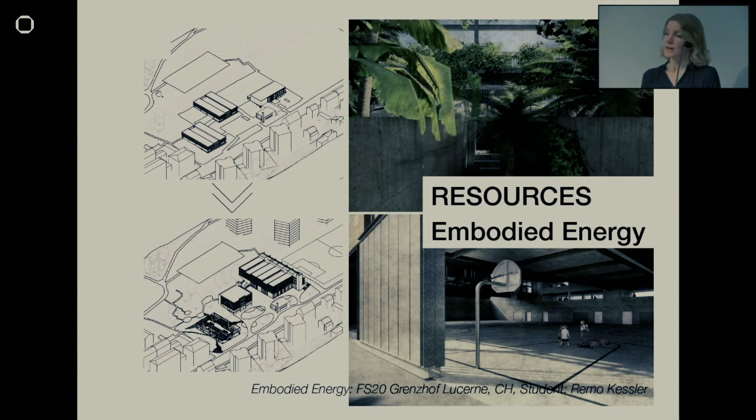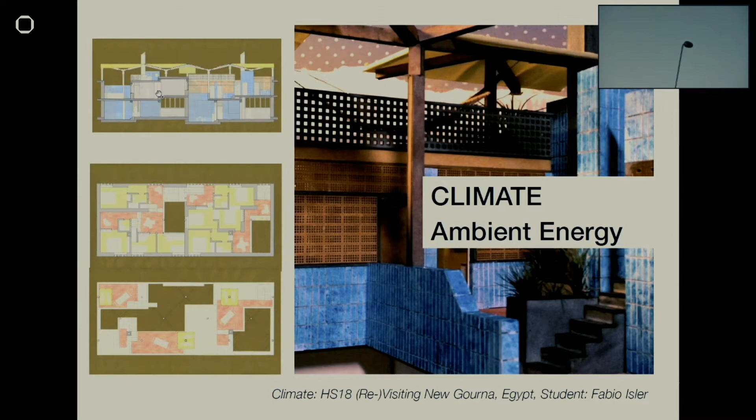Our building stock, our existing building stock, and what we can do with our new buildings. I was asked to tell you about what I do in my daily job and how we are preparing our buildings to be climate neutral and how we make them future-proof.

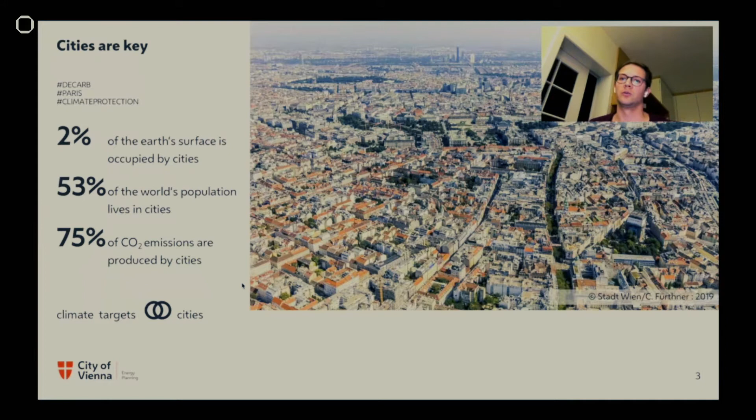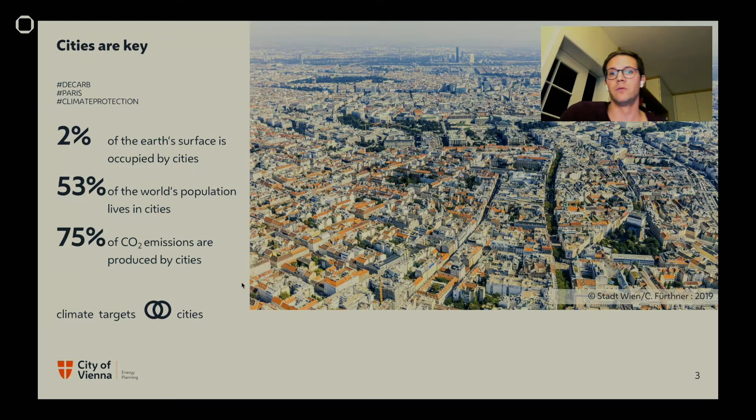Cities, of course, are very important to tackle climate change. They just cover about 2% of our Earth's surface area, but in the meantime, more than 50% of the world's population is living in those cities. And the cities produce more than 75% of our CO2 emissions currently, so that's quite a lot. That means if we want to fulfill our climate goals, we have to start with our cities if we want to have some chance. Therefore, we have to use the renewable resources which are inside our cities.

Basically, the resources are those four which you can see here: deep geothermal energy, which will be integrated in our district heating network; shallow geothermal energy, which can be used for heating and cooling individual buildings; and waste energy, on the lower right side of the picture. It is important to use the energy which would otherwise go back to the environment and heat up our cities during summer even more, and instead use this energy for other use cases.

And of course, solar energy is the fourth renewable energy source in our cities, and we have to implement it in a very creative way so that we not only produce energy on an area, but also make a green roof out of it, make a livable space out of it, so we can use our limited free areas in the city very smartly.

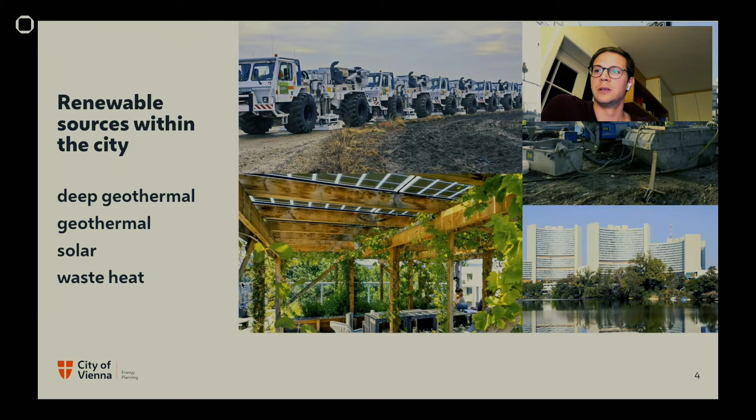In Vienna, we have climate protection areas. Sorry, this graph is in German, but I think you can imagine what it means. In those areas, you can only use renewable energy sources or district heating for heating and warm water for your building - you are not allowed to use fossil energy for those purposes. So they are completely fossil free, those areas. Currently we have 4 districts, but in the next 2 years the complete city will be covered with those areas.

They are just important for our new buildings. In the future, of course, we also have to think about how we can integrate the existing buildings into those climate protection areas. But that has to be done in the following years, I guess.

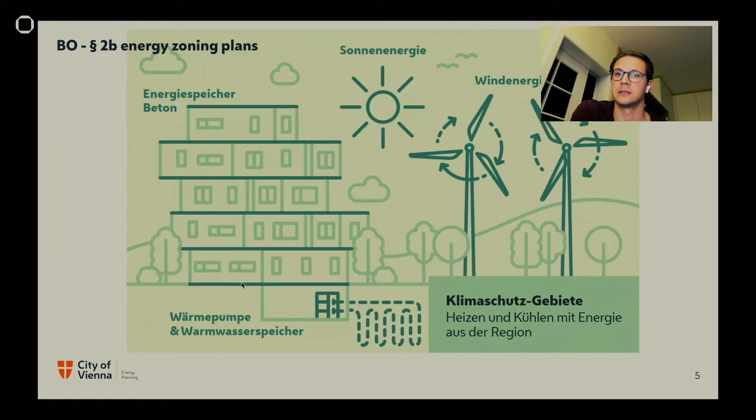Therefore, the building stock will be very important because most of our cities are already built, and therefore we have to find solutions for how we can decarbonize our existing buildings. In Vienna, we have more than 400,000 apartments with gas heating, with gas boilers. We will connect a lot of them to the district heating network. A lot of them will use heat pumps, and a small amount of those buildings will use...

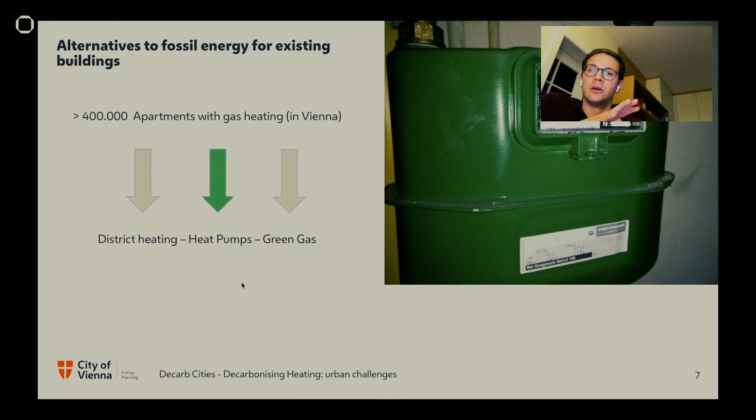...green gas, but green gas, of course, will be used more efficiently in other areas, like energy producing plants, power plants, maybe for industry, and buildings are not the first priority for using green gas.

Because cities are so limited, we have to work together with our regions. We have to import green electricity and green gas in the future because the city's area is just too small to produce enough energy right inside our cities. Currently, we are importing fossil fuels from all over the world, so that has to change.

One showcase project from Vienna is MGG22. It's an apartment building where the energy comes from the soil. It uses geothermal energy, and it also uses wind energy for powering the heat pumps. The windmills, of course, are not located in Vienna - they're on the outskirts of Vienna or in Lower Austria.

And if the windmills produce too much energy so that the market price would be negative, the heat pumps run and produce warm water and room heat. So we are storing our heat, our renewable energy, in the building's concrete. Concrete is a very effective battery system, you could say, for storing renewable energy.

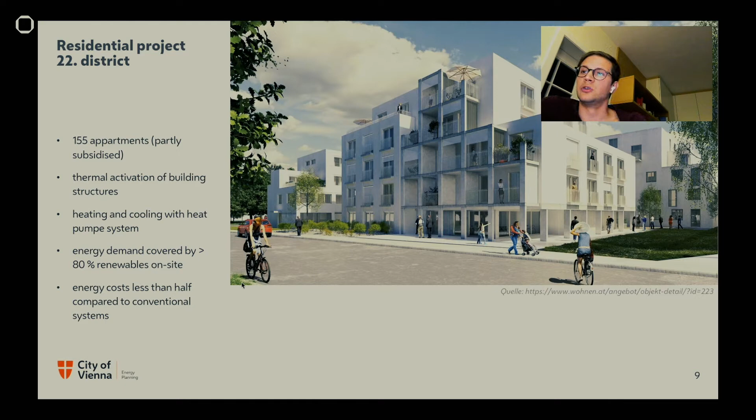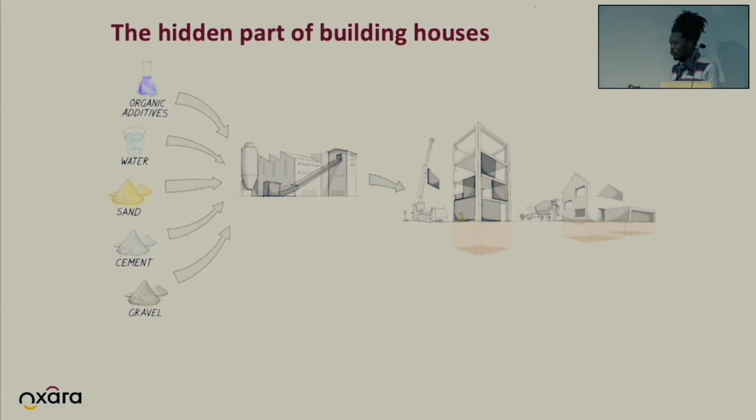We all know that we need gravel, sand, cement, and water to produce the concrete that will be delivered on the construction site. What we often forget is that during this process, there are millions of tons of excavation material that is landfilled.

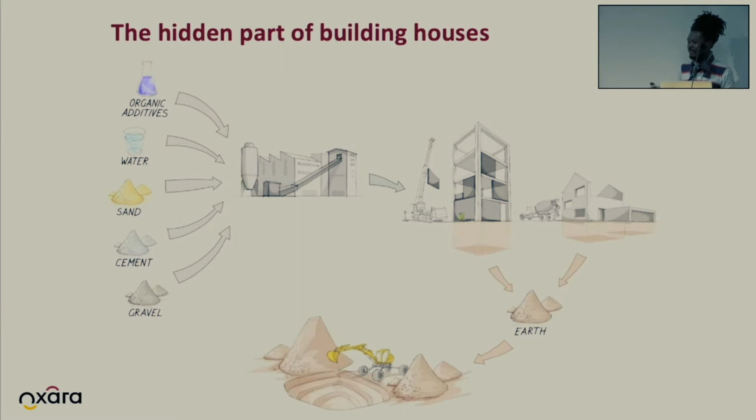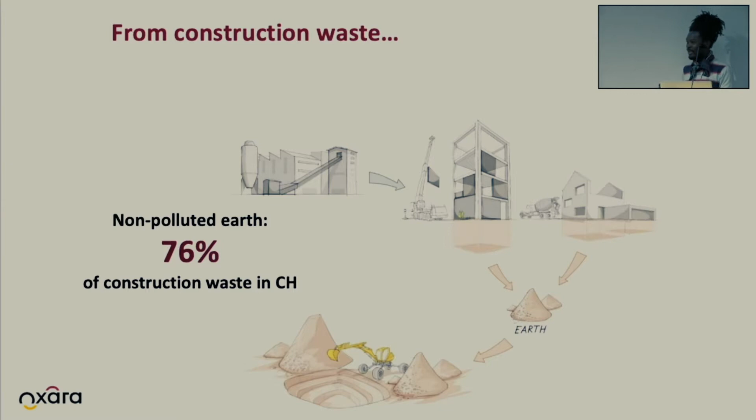Non-used resources that are locally available. In Switzerland, this represents around 76% of construction waste—almost 35 million tons of excavation material landfilled each year. Worldwide, we are talking about more than 1 billion tons of excavation material.

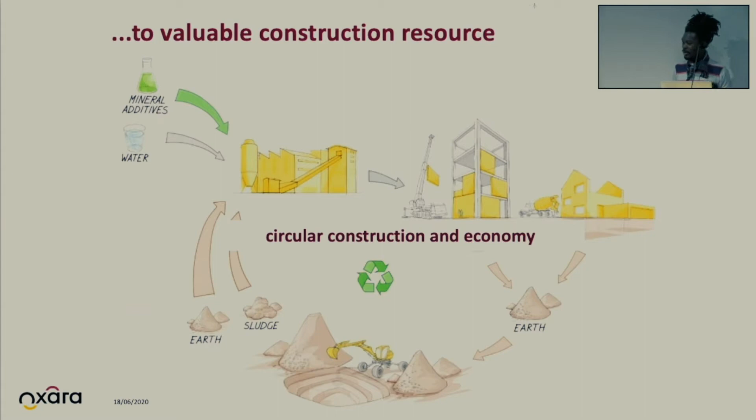So what are we trying to do with Oxara? Turn this construction waste into valuable construction resources to promote circular economy in the construction industry. How does it work? Here I have a small video that shows our process.

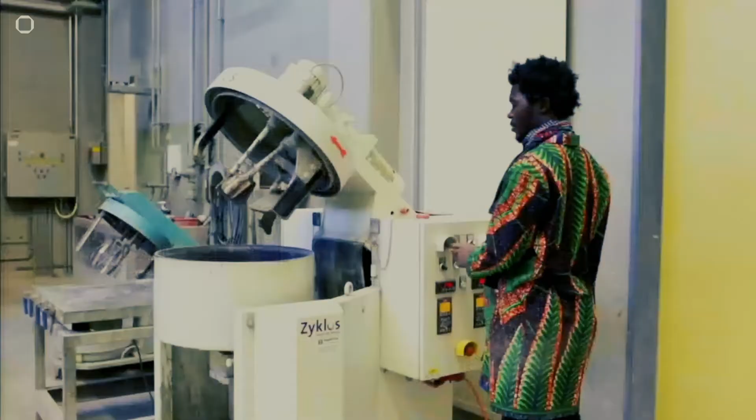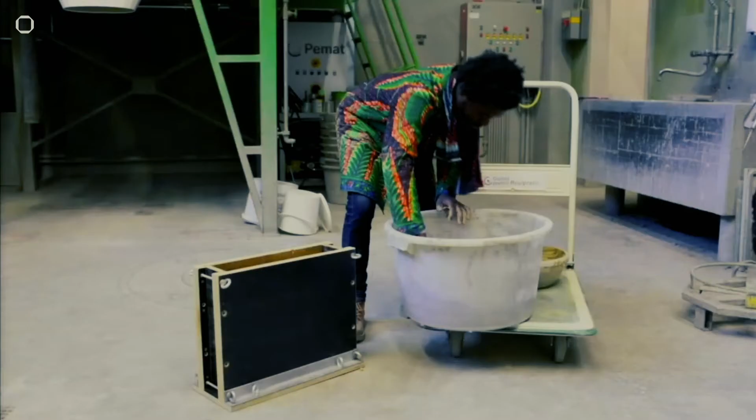Basically, we take the waste, we add water, and we add our technical solution, which is our mineral additive. We mix everything in a normal concrete mixer for the material to homogenize, and then by hand or similar construction processes, you can have a fluid mix, vibrate it, put it in a formwork, and after 2-3 days, or 1 day depending on the volume of the wall, demold it.

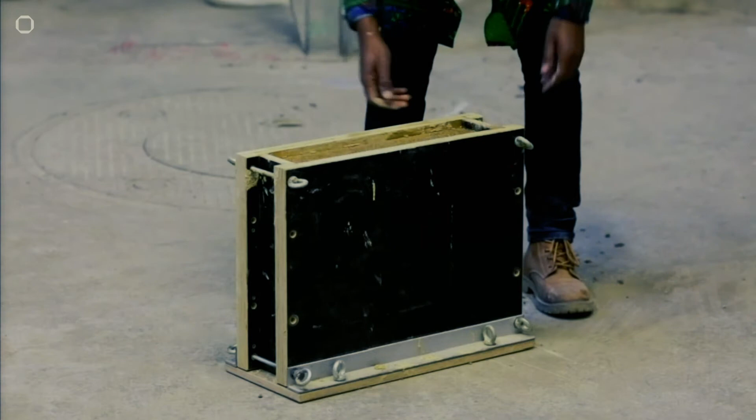Therefore, you have a material which has self-supporting load capacity you can use for non-structural applications and for low-rise buildings, 2-3 story houses, for instance.

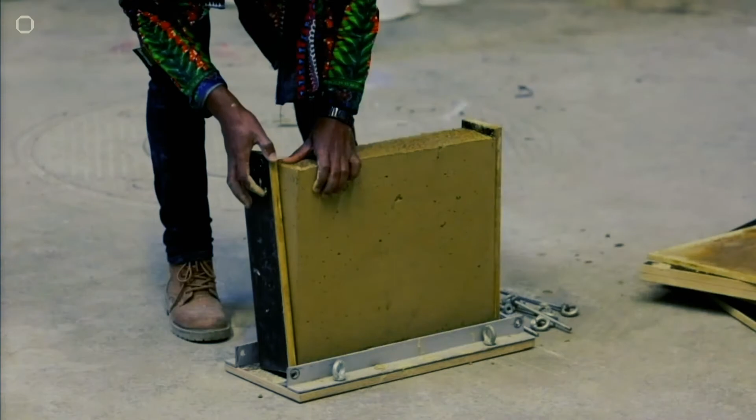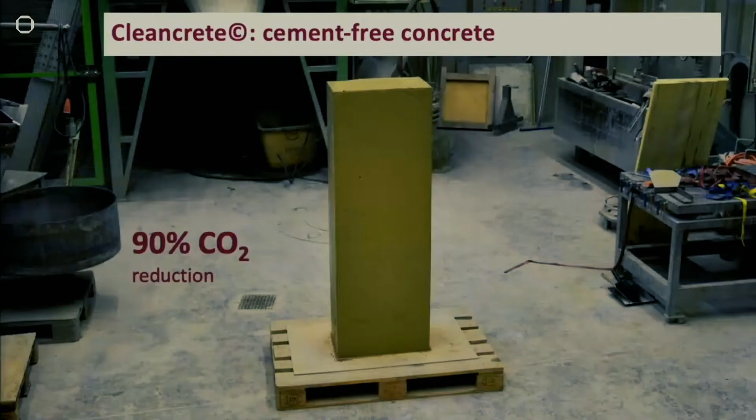So this was the outcome of my PhD, basically. And since then, what happened is that we tried to produce at a bigger scale. Doing also the life cycle assessment, we realized that we can reduce up to 90% CO2 compared to normal concrete.

So here we have a first cement-free concrete technology. We have also done other different tests—how can we use the material for floor application, for instance?

Here we worked in collaboration with In Situ Baubureau Architecture here in Zurich to make this floor solution that is cast on a corrugated sheet. At the end, you can put either a stone plate or leave it completely open.

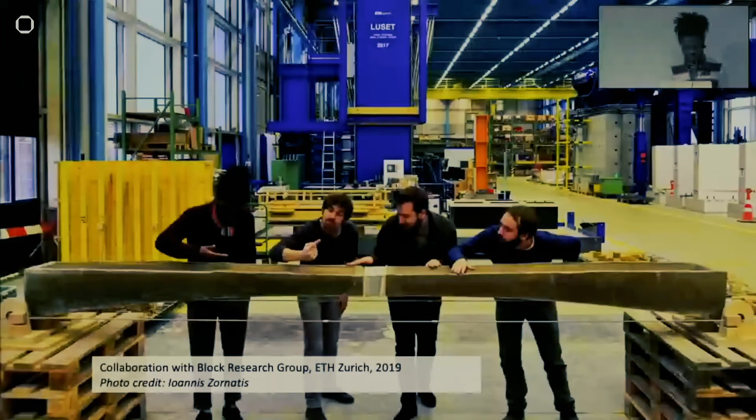Another approach we look into is how do you optimize material in your floor element. We work with the block research group at ETH, where we try to create a funicular floor using low performance material, and everything is afterwards pre-stressed with this metallic wire, as you can see in the picture.

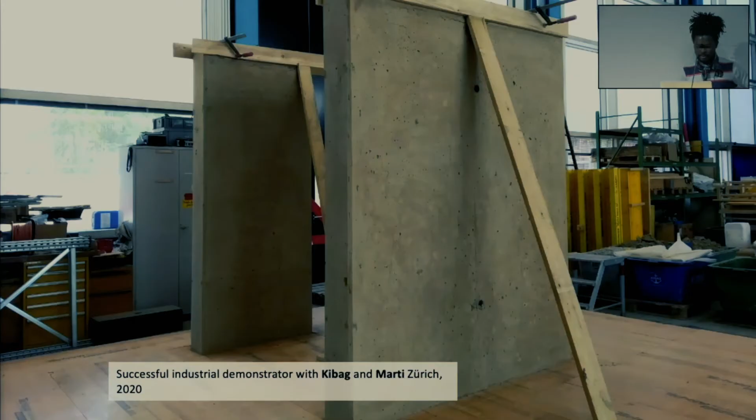Another big scale test we did this year with a Swiss recycling company and a construction company is this wall that we cast on a Friday and demold on a Monday, so 2 days in a mold. It was up to 2.5, 2.6 meters high, 25 centimeters, and had the fluidity of normal concrete. This proved that it's possible to use this material for non-structural applications.

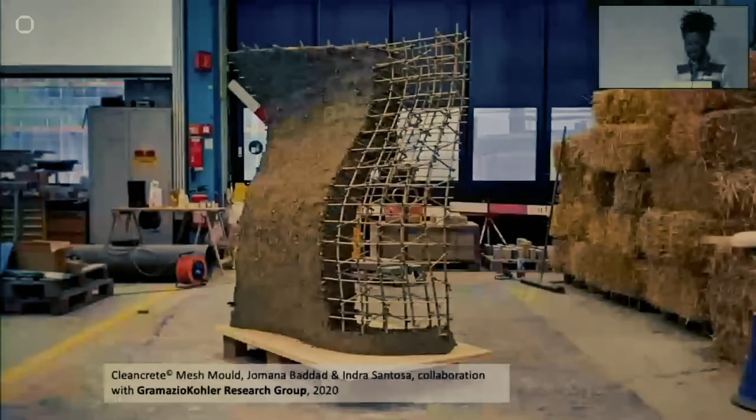Another example is how can we integrate it with reinforcement, for instance. Here we worked with the Gramazio and Kohler department at ETH and some students, where we did a Cleancrete Mesh Mould. The mesh here plays a role of reinforcement, but also of a formwork.

Now our next step is we want to design or build this small pavilion coming in December, and hopefully we can share the outcome with you guys.

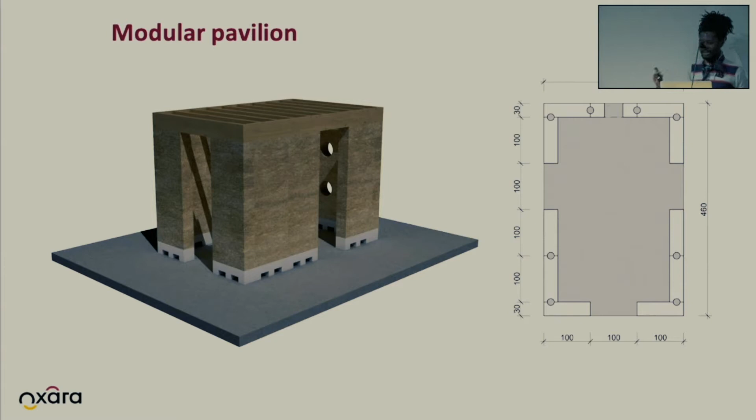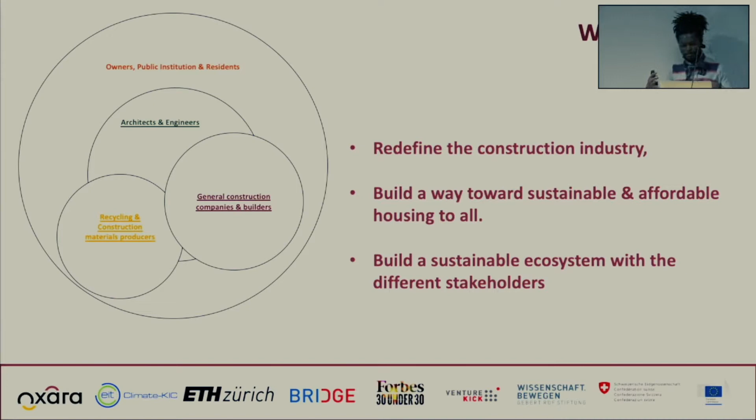And who are we exactly? We are Oxara, and we are trying to redefine the construction industry, building a way towards sustainable, affordable housing for all, but also building a sustainable ecosystem with the different stakeholders. I have mapped here the current stakeholders, how they are dispersed, and we hope with Oxara we can bring them all together and create a really strong ecosystem.

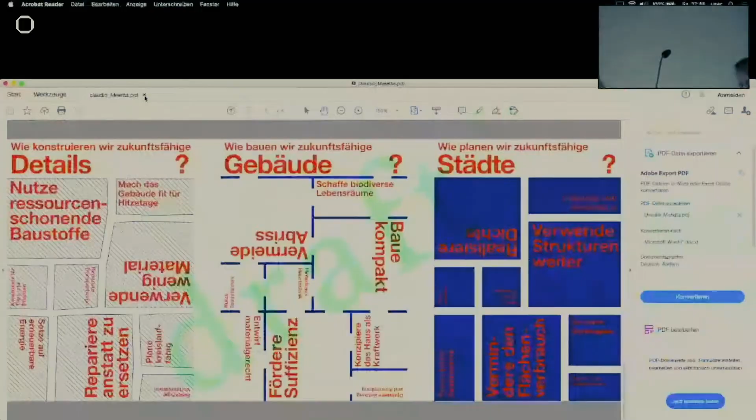Yeah, it's really inspiring to hear about all of your different initiatives and how you're working within your respective fields to tackle this topic of climate neutral construction practice. I just want to start by zooming out a little bit and taking a general inventory of the status of sustainable construction today, because one question I was thinking about while preparing for this talk was that sustainability in construction is nothing new.

Honestly, it's a topic we've been talking about for at least maybe 50 years.

Maybe it's a bit of a naive question, but why is it that we haven't figured it out yet? We've been talking about this for almost half a century now. What continues to be the obstacle towards a more universal understanding of what sustainable construction is, and how we can act within construction practice to minimize our impact on the environment? I'd like to ask all of you to say something, perhaps with reference to the fields you're working in. Perhaps Stefan, if you'd like to start.